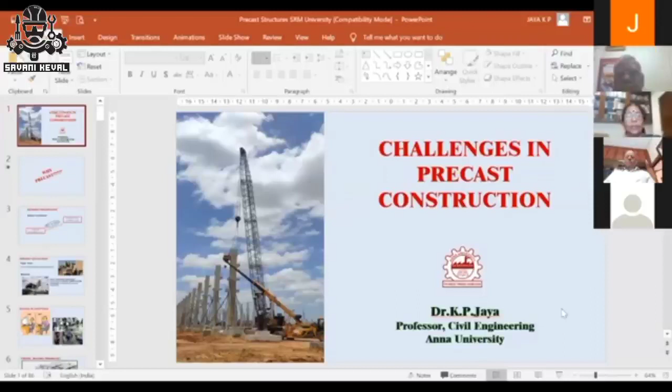My topic today is challenges in precast construction.

Before entering into that particular topic, I just want to say why precast. We are very familiar with monolithic construction, what is happening in and around in society. But we need to think about why we are going with precast.

Look at this particular slide. Think about the demand for housing. In the Indian scenario, at present, around 26.53 million units is the requirement for accommodating our own sisters and brothers to have their own inhabitant. But after 10 years, we are expecting around 50 million units to be the expected requirement.

How will we do this with normal monolithic construction? Now itself we are facing a major issue - lack of skilled workers to execute the project. This is the normal way of constructing beam column connections, and putting partition walls with brick or brick masonry structures. There were skilled laborers available when the demand was less.

But now the demand is too high. We don't have any such availability of skilled workers. So what is the solution? We have to go with some mechanized construction. This mechanized construction nowadays we are calling precast or prefab construction.

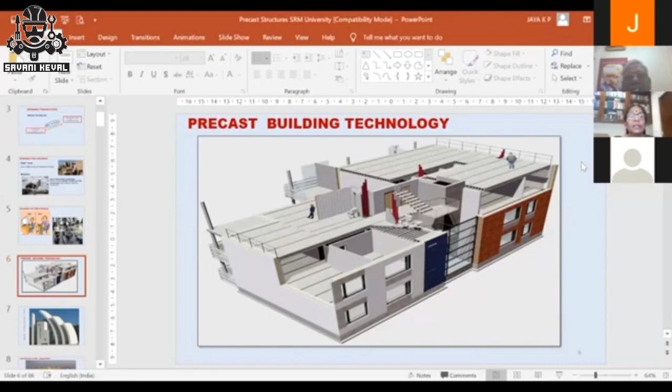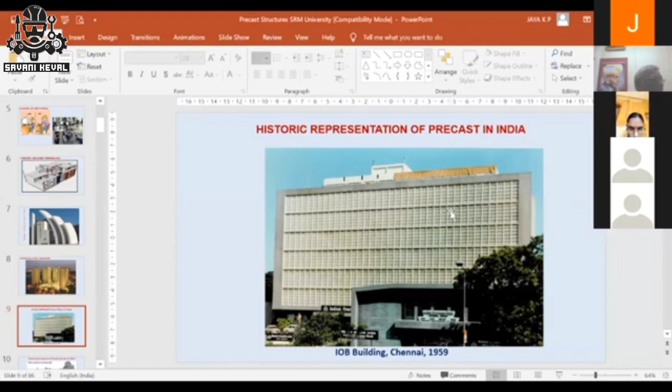There are few strengths like speed, low maintenance, seismic resistance, all those things are there. Along with the strength, there are some weaknesses also, lack of awareness. Many of our engineers are not aware of this particular technology because we are not teaching them in our PG program or UG program. Later, from 2006 onwards, we are in Anna University teaching precast technology for our PG students.

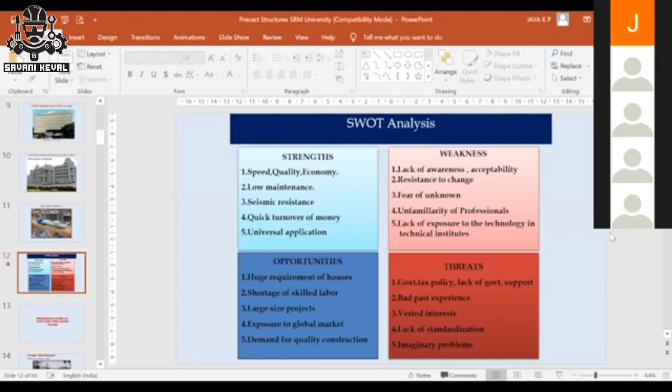Then there will be a lot of imaginary problems with the engineers. Once we start learning something, we will not come to a conclusion that okay, this is the solution - that is the imaginary problem. But once we start thinking about it - to learn swimming, we have to jump into the water, then only we will learn swimming. That is my policy. We have to venture into that, find out what the problems are, and solve them. We, the engineers, are there to solve the problem. So that is the threat we can solve at any cost.

That is the major observation - structural elements were intact, but joints and connections failed. So the major issue with precast structures is poor connections. We need to give more attention towards that. That is the challenge in precast construction with respect to connections.

What are the different connections? Column to... these connections are like our body - there are connections in our bones, knee joint connections, shoulder connections, and knuckles in the fingers are also connections. Each and every connection has to perform perfectly, then only we can do our work without any difficulty. In a similar fashion, precast structures also have different varieties of connections, and each and every connection should be ductile as well as strong enough to maintain whatever service load it has to take care of.

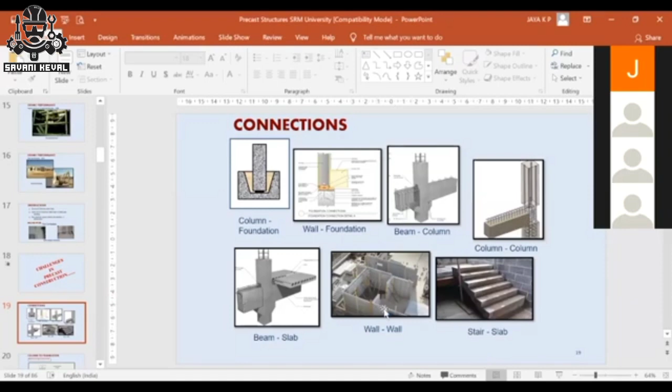Here you can see column to foundation connection, wall to foundation, beam to column, column to column, beam to slab, wall to wall connections, and stair to slab connection - these are varieties of connections that are there. You can see here, these are the column to foundation connections, these are the base foundation. From there, the column reinforcement is protruded outward, and these are the sleeves - 12 sleeves with 60mm diameter, which will be embedded within this column.

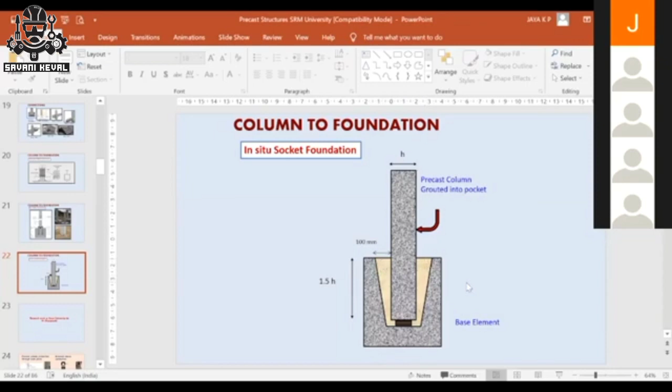Based on this column-to-foundation connection work, one of my scholars, Ms. Mamadi, has done this research. She submitted her report and is about to defend it. These are the different types of connections she has adopted: precast column connection through the base plate, with anchors coming out of the foundation connected to the base plate, and also the sleeve grouted sleeve connection.

She has put — you can see here — this is the sleeve. This is the view of the area where the grout will be inserted in a later part. And this is the pocket connection.

There she has used two types of connections. One is the pocket, where she is inserting the column into the pocket, and there she has put reinforcement all throughout covering the pocket together — starting from one point to the other, connecting these two elements together. In the other type, independent walls have been connected with independent reinforcement, and later, at the joint region, it has been connected together. These are the two types of pocketed connections she has done.

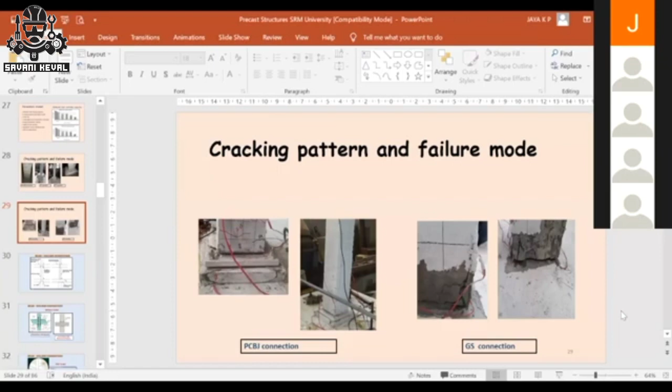This is the view of the load setup in the laboratory. She has done a lot of investigations — this is the cracking pattern. I'm showing this to give a clue about how we can execute research and come out with a solution. Finally, we identified that the pocketed connection with reinforcement wound all around performed better for a low-rise building.

Now come to the next type of connection: beam-column connection. This picture has been taken from Elliott's book — it is a very good statement made by Elliott. You can see here the column is continuous and beams are discontinuous, and here the column is discontinuous and the beam is also discontinuous. If we think about a better option, connection A or B may be better, but what is lacking there? We cannot cast multi-story height columns in the factory and bring them to the site — erection is a difficult task.

So finally, people will go with this type of connection — which one? C-type, where all elements are meeting at a particular junction. Junctions are always dangerous, and here also it is dangerous, so we have to provide proper connection detailing.

These are the various types of connection detailing without corbel. We can go through this — this is the beam passing through the column, the column is discontinuous, and this is the dowel protruded outward. These are the major challenges in precast construction: this protruded bar should be properly inserted within the column sleeves — that is the major challenge. That is why I am telling you that we need to go with standardization. This is the beam-column connection with corbels.

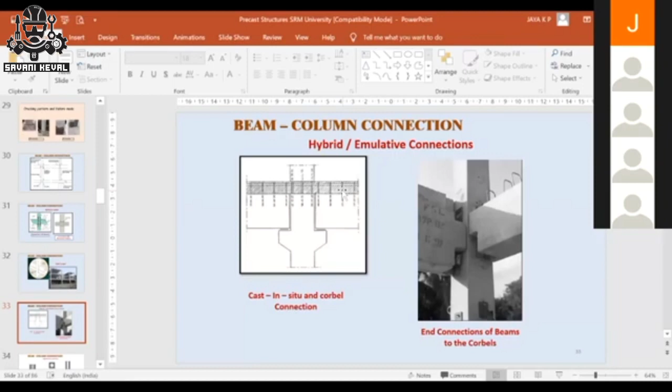So this is another type of hybrid connection. This has generally been followed by Shirke, BG Shirke. There they are using a cavity sort of thing. This is a double column connection. This is a shell, and after erection, this interior portion where the dotted shade is there will be filled in with in-situ concrete. This is the way they are constructing the beam column connection.

Here, beam reinforcement which protrudes outward will be bent into the interior of the column and connected together like this. This is the longitudinal reinforcement continued through the column region. This entire portion, shown with the dotted hatch, will be filled with in-situ concrete. This is the longitudinal view of hybrid connections.

And this is the actual practical view. This is the column. You can see here, this is the protruded projection outward, and on top of this column, the beam edge will go and sit. You can visualize that in the next picture.

So what has happened here? This is the cavity. There you can see the protruded reinforcement also. The main longitudinal reinforcement bar will be connected, pass through this top region, and it will be cast as a single unit in a later part.

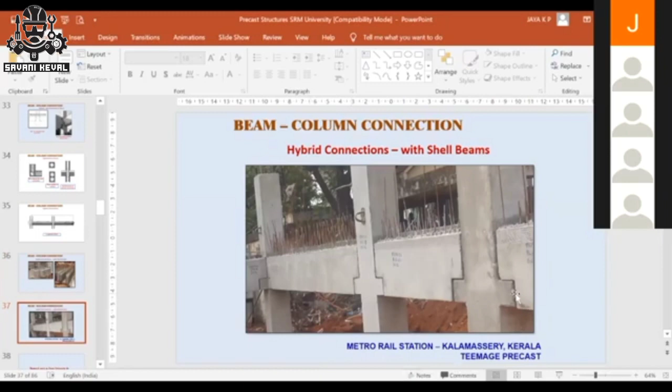This is a picture taken from Metro Rail Station, Kalamassery. This has been done by Teemage at Coimbatore. One of my research scholars has done work on beam column connections. She has done a lot of connections, and we have published papers in ACI journals. These are the various types of connections she has considered.

Tie rod connections, and this is the cleat angle connection - you can see here, this is a cleat angle which is connected here. We have connected with one rod here, another rod here, and this is another type with a single stiffener. We have put this one stiffener also. We have tried one by one.

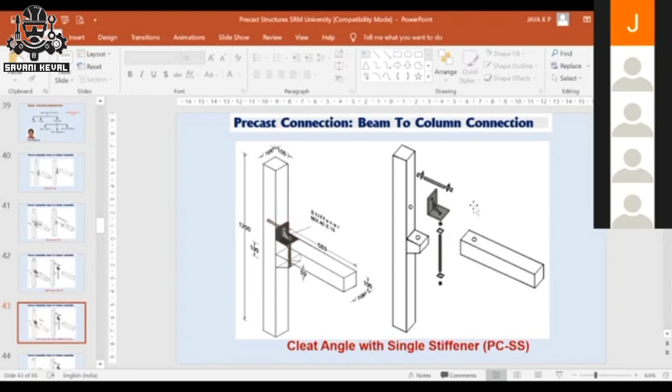Whenever we couldn't reach the strength up to the monolithic joint, we did a lot of improvisation. That's what is shown here - we used a double stiffener also here, and this is the double bar which is coming out. That's what I told you, this is a better solution.

This is a corbel. There's a double bar coming from the column region, protruded through the corbel, and the hole within this beam can be housed through this bar and rest on the corbel. Later it can be mounted with nut and bolt.

And this is another method - this is what we have tested in the laboratory, and these are the specimens. She did numerical analysis also, and we identified that this type of connection has given better performance during lateral loading.

Now comes the column to column connections. This is a very, very important connection in any precast structure.

This is, you can see here, 1 minute.

You can see here, this is the upper column and this is the bottom column. In this particular region, when we are casting, if we are delaying the casting of the in-situ concrete, this reinforcement should not get rusted.

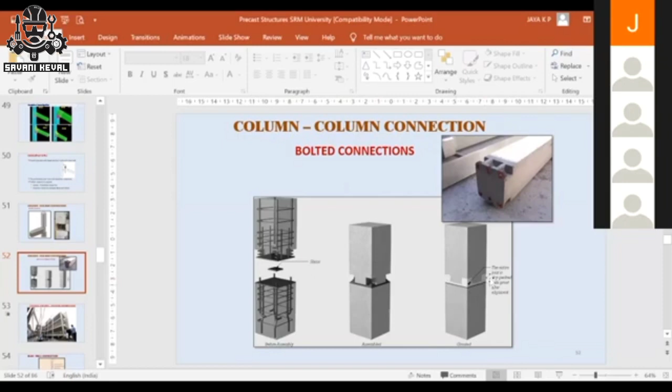So we have to be much careful when going with this type of connection. This is the column to column connection with bolted base plate connection, similar to what I told you about the foundation column connection with the base plate. The bottom column will house this protruded reinforcement, and the top column will have a base plate, and they will be connected together. Later this portion will be grouted with non-shrink grouts. So this is the typical column column connection.

1 minute, let me try this. I have, yeah. Video is viewable. Yes ma'am, yes ma'am.

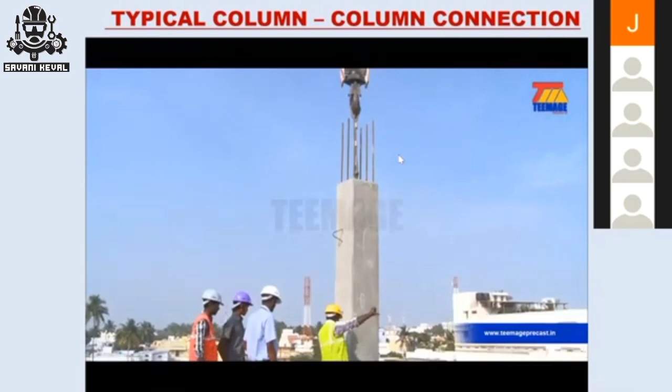This is a video I took from Chennai Silks Velachery site.

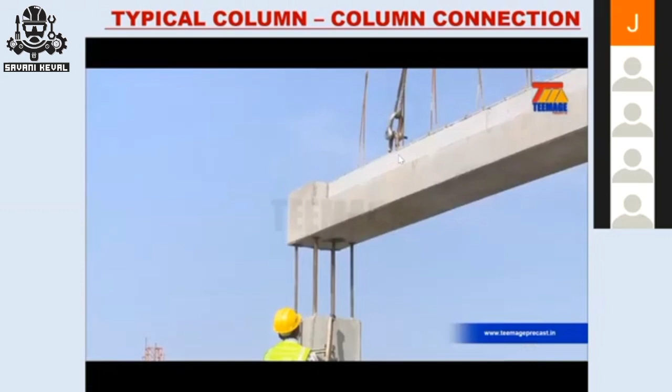I think whatever I told, one scene, it is clear. Am I correct? Yes, madam. Yeah, this is nothing but connection.

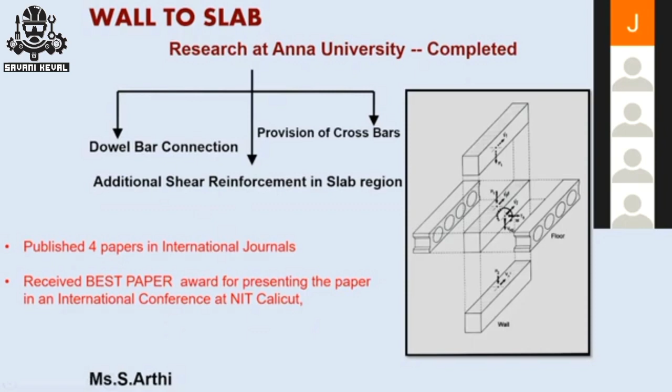One of my research scholars, Ms. Dr. Arthi, she has defended and got her degree, and she has done work on wall to slab connections. She has used many types of connections like dowel bar connection, provision of crossbars, and additional shear reinforcement. She published 4 papers in International Journals, and she received a Best Paper Presentation Award in NIT Calicut also. She is a very good scholar, and she has done very good work.

This is the monolithic specimen what we have kept as a benchmark element.

Gunasharan sir, yes madam, how much more time? 5 minutes I'll get? No issue, madam, please take me, I think I have crossed my time. No issue madam, 2 minutes, 5 minutes, I'll finish it off. Okay.

This is what I can say, this is a wall to slab connection. As you can see here, this is the upper panel and this is the lower panel, and we are getting connected. This is the cross section of the precast element.

There we used, you can see here, this is a wall to slab connection element. And here wall to wall dowel bars, we have provided 1 dowel bar like this. And this is the bar which is getting connected with the reinforcement. Here also we have provided, what I can say, a U-hook sort of thing, and here another U-hook sort of thing.

This is the second type, and this is the precast element P2. Here, 1 continuous bar from bottom wall to the top wall and another U-hook here. And here, this is the precast specimen type 4.

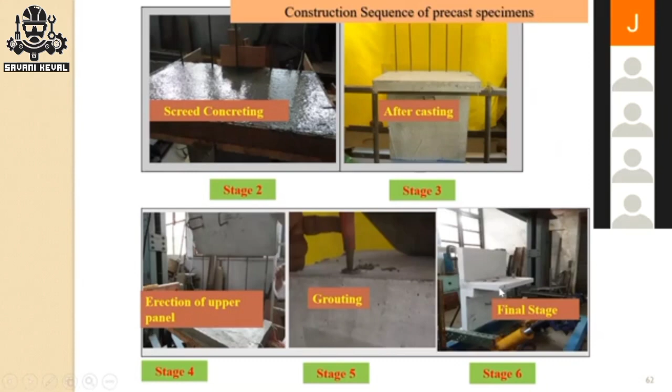The major observation initially we got is there is a splitting up of cast in situ bars, slab and precast slab. Our suggestion, the major suggestion based on this particular study, is we should provide shear reinforcement in between the cast in situ and precast slabs.

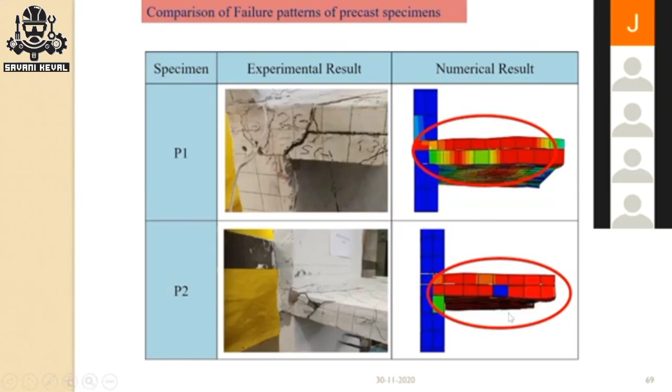And these are the studies she has done on precast. You can see here, this delamination of 2 types of slabs has been very well pictured in the numerical analysis also. Exactly the same way we could picture it in Abaqus software. And these are, you can see here, this lifting up of the slab, exactly we could picture in Abaqus.

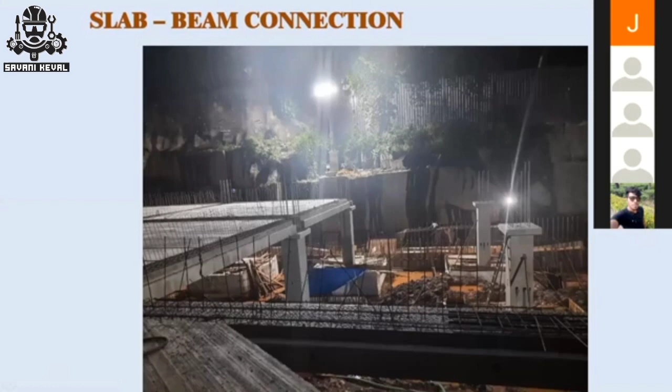You can see here, these are the slabs and this is the beam, and from the beam you can see the protruded reinforcement. While providing a screed concrete, this slab reinforcement will bend on either side of this beam and bind it along with the screed reinforcement before pouring. You can see here, this is a site of one particular precast site image, and this is one of the beam slab connection shown in a small video.

Now you can see here, I'm projecting the wall-to-wall connection from the picture from the side. This is one wall to another wall connection, and we have to provide intermediate loops in between these walls before pouring the concrete.

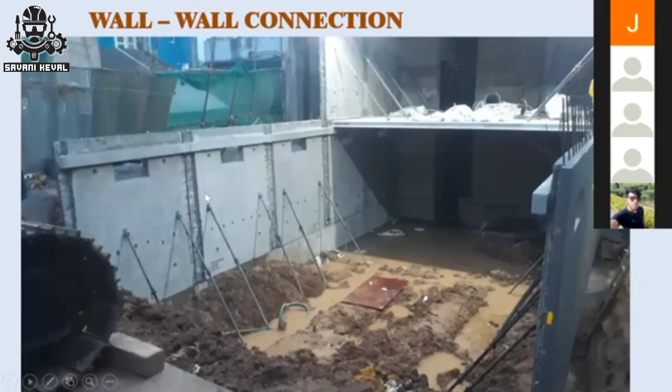You can see here, this interior is the joint region. We are pouring the concrete at the later part after connecting the walls together. You can see the view of it, so this is the connection region. Later, you provide formwork outside this connected detailing of the reinforcement, and the concreting will be poured after placing the walls.

And most of the time, we are using these type of loops or the reinforcement bended like this. There is a lot of work happening at IIT Madras with Dr. Amlan Sengupta and Dr. Meher Prasad, a lot of work related to these wall-to-wall connections.

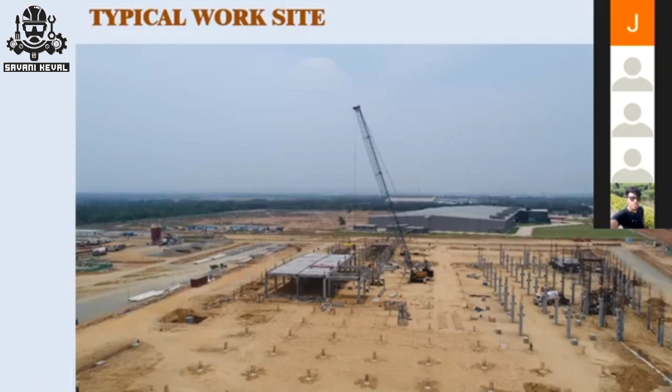But if we get a site like this, yes, we can enjoy like anything, but it's very, very difficult to get a site like this with an open space. So when we do get such a typical site, we can be happy.

So you can go through this book, and I am happy to say that I have authored 2 chapters in this. And there is another book on precast by BMTPC that also gives a lot of important information related to precast construction. If anyone wants to go through it, you can go through that book also.

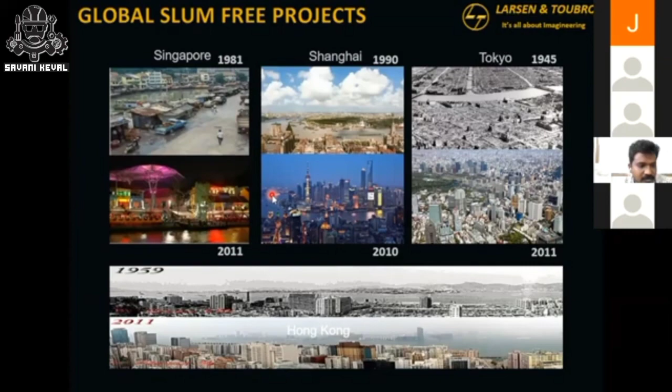What are we doing? We are not doing anything new. Most of our neighbors have done this already. If you see Singapore, Shanghai, Tokyo, Hong Kong - they've all gone through the same challenges, the same housing situations. What is unique to us is, if you see, they've all done this over a 20, 25 year timeframe. We are looking to do the same thing, actually at a larger scale, in about 7 to 10 years. So that's the challenge that we have.

Again, in terms of infrastructure, have we not done this already? If you see your metros, your airports, your high-speed railway now that we are building - the latest technology is already there, right, we are establishing it. If you look around Mumbai right now, I have a high-speed rail project going on, I have an entire metro development going on.

We have coastal road development going on. In one city, there are 3 landmark projects going at the same time with the latest technology—most of the situations that probably not even the European or Western world have experienced.

We are using those technologies, but if you look at housing, somehow that has not translated. We are still mostly using conventional means. 95% of our construction is still built using conventional methods. And if you see outside, one of the key things in how outside countries have solved this problem is by mechanization.

So when I say precast building, that's not the only solution. Any mechanized building, anything that works on a mass scale—maybe PEB, precast. Precast works well because our population is used to concrete. There is a huge comfort in concrete, in seeing that brick and mortar building. So that's how precast is becoming popular here.

So if you look at the end user and what they want, these are the key 4 things. We talk to a lot of them, we do surveys, and we see what the customer wants, what the end user wants. Again, government is not the customer—the people who stay there are the customers. These are the 4 main things they would want from a technology. As long as they get those, it does not matter how you build it for them.

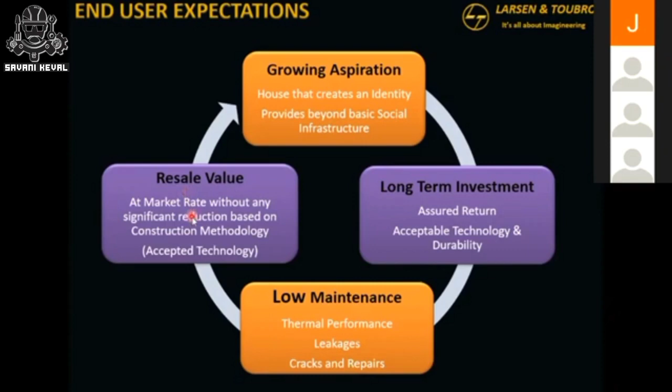And of course the resale value should be acceptable—tomorrow if I need to sell it, somebody should willingly come and take it off. So that's the basis behind what we also look at when we evaluate different technologies. College students, if you go into this field, for the next 10 years we are going to evaluate various technologies to get rapid construction in place. These are the key things when it comes to housing you should be aware of—this is what your end customer wants.

Now what we have done—if you see, this is pretty much the history of L&T. We have been doing conventional construction since the last 50 years. In the 90s, we experimented with tunnel formwork.

This rapid construction demand is not new—we have been doing this day in, day out for several years. If you explore the way the technology works, even to this date, this is by far one of the fastest construction methods you are going to see. It works even faster than precast, but it works only for very boxy buildings. There are very stringent layout requirements that usually are not accepted by end customers—rectangular buildings or very rectangular-ish layouts, which usually doesn't work in Indian construction.

Then around 2000, we started doing aluminum formwork. This quickly became one of the most popular construction methods now when it comes to rapid construction. In residential construction in L&T, 95% of the projects to date have been constructed using the aluminum formwork system—to an extent where within L&T we own probably about 6 lakh square meters of shuttering. Usually that's a huge number.

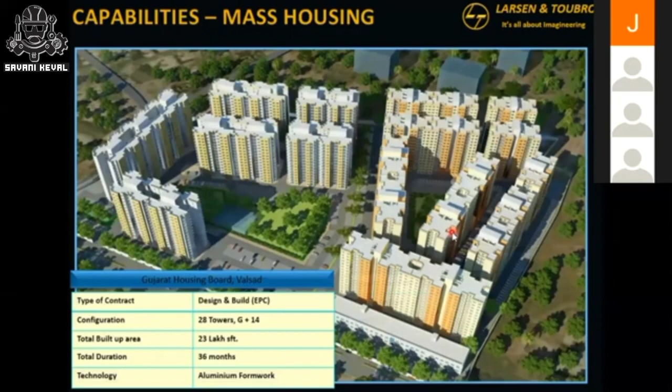So you need to have that enough experience, and we've built that. This technology has evolved out of our experience. We are not a precast concrete manufacturing company. We have selected precast concrete out of our own needs, understanding that whatever you are doing is not going to be enough.

So what I wanted to drive here is, especially for the budding engineers, the building design does not come on its own, right? It's not just putting walls and columns and pouring concrete. A well-designed building has to be looked at, investigated for various parameters, especially if you're looking at mass housing.

We are looking at building 100 buildings, 20-story tall. You have to look at the cost, speed, what the end user wants, what are the bylaws, what are the structural integrity requirements on the design.

With all those parameters, if you work together, L&T is one of the very few contractors who has his own in-house design firm. I used to be in the design field, now I've moved to the BU side. But one of the few contractors who have all design engineering teams, including structural design, architectural, MEP, CMPC methods. So we get that one unique solution, and that's how the precast technology at L&T has evolved over the years.

So the client gets one answer. He's not going because you're doing precast, what do I do with the MEP? And we don't say that you go to a different consultant. The solutions that we are looking at will probably over the years set the industry standard, looking at all engineering aspects.

Now, before we start going further, one key point to note is we have usually 2 different systems. One is the beam column system in residential construction, which is what we have been doing for several years. And then the new rapid construction, what we are looking at, usually the aluminum formwork system, the tunnel formwork system, or this precast. They come under this load-bearing shear wall concept.

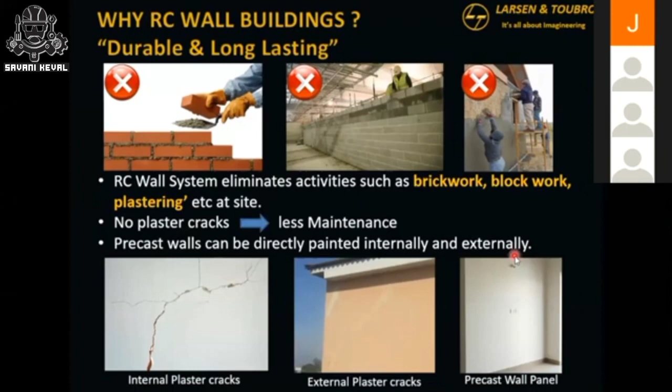So this is one example - this is our own project, and what you see is especially for the mass housing or this government housing where the maintenance budgets are not sufficient. If you see this building, the first story was done in cast-in-place, and the above is precast. This is a 9-year-old building which has been handed over. And if you see the plaster, this was actually year 2 and year 3 where it starts fading, spalling.

The paint is going on because the plaster was never meant to be a long lasting element, right? It's a finishing element, but it absorbs moisture. The moment water gets into that, you're going to see the paint fading and all. Here it's an RC grade concrete - the paint has not been retouched for 8 years, and this picture was taken about 6 months ago.

So in 8 years, that building has stayed the way it is. I'm not going to go into key details or advantages, but in general, whatever benefits you get in RC aluminum formwork type buildings, you are going to get the same benefits in precast, plus the advantage of speed and quality, which comes from factory quality control.

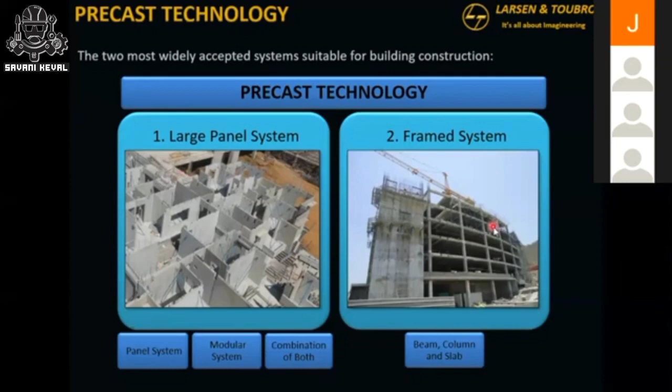How about the design now? What do we do when the precast design comes into picture? Even in the structural philosophy, there are two main things. We are probably going to focus on the large panel system that we proposed for housing. Then, of course, there is the beam column system and separate research. Professor Jaya has already covered a lot on those connections.

When it comes to load-bearing wall system, all you are looking at is dismantling your building into as many 2D elements as possible. Those are easy to manufacture, easy to transport, and then you take them to the site, assemble and stitch it. What we call stitching is the wet concreting to connect these two members together. So there is no rocket science.

But from a contractor or rapid construction perspective, the conventional construction system involves formwork, reinforcement, concreting, then you come back and do block work, plastering, POP work. What we are doing in precast is mainly eliminating this block work, plastering, POP work, which usually takes a lot of workforce and workman activity. Whatever key or cumbersome activities are left are done at a factory, then you transport the element and finish at site. That's where your advantage of time is coming from.

Structural design philosophy wise, in the conventional beam column system, we'll have beam columns as gravity elements, and some lateral shear wall elements which take your wind and seismic lateral load. What we are proposing here is that by default most of the walls are going to be load bearing members, and some of those walls will be shear wall elements, and that's how you design the building. It has its own redundancy.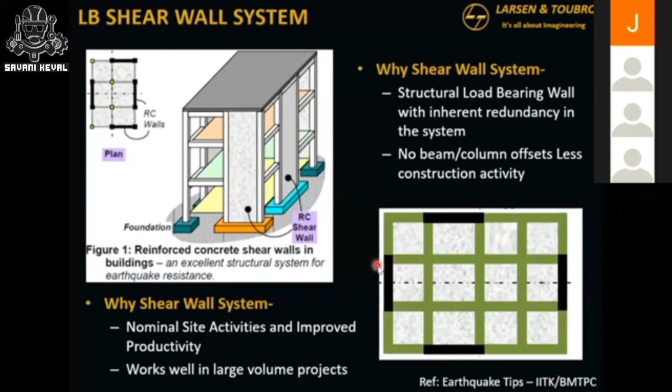In the earlier system, there's a progressive collapse requirement, and if one column is damaged, your entire large area is in question. In this system, if one small portion is damaged, there are still several walls to take care of that element, so that redundancy is better.

Now with that system, how do we analyze the precast system? What do codes say? This is one thing I want to stress with everyone. In precast connections, there are two different schools of thought. One is the emulative approach, which says you detail your system such that it behaves equivalent to monolithic RC construction. Then there is the jointed approach - welded and bolted connections. Before I came to India, for 10 years I was doing only welded and bolted connections. Nobody was doing the emulative approach there.

Why? Because it takes time - there is wet concreting involved, it's more expensive to do it that way. Welding and bolting are easier. Second, usually they don't build tall - buildings you will see are 12 to 15 stories, not more than that. More than that, usually steel is cheaper there.

So that works well there. Here we are building 23 stories, even we have designs for 30 stories, where the emulative approach works well, even if it comes at a slight cost of time for site activities, but performance and design is similar to conventional construction. That's how we have taken all our residential projects that you see - they're based on this emulative approach.

If anyone is interested, there is the ACI document 550.1. There are various revisions, but this is one of the best guides from the American Concrete Institute. What it says is basically emulative detailing provides structural performance that is equivalent to the structural performance of a monolithic concrete structure - equivalent, that word is important. So you do your detailing well, and then you construct. Once it performs equivalent, you are not worried how it will respond to earthquake - it's going to respond similar to a conventional building. That means you can go back to your 456, which is the most involved code in India, and adopt the same code for the design principles. Of course, we also have 15916, the specific precast code.

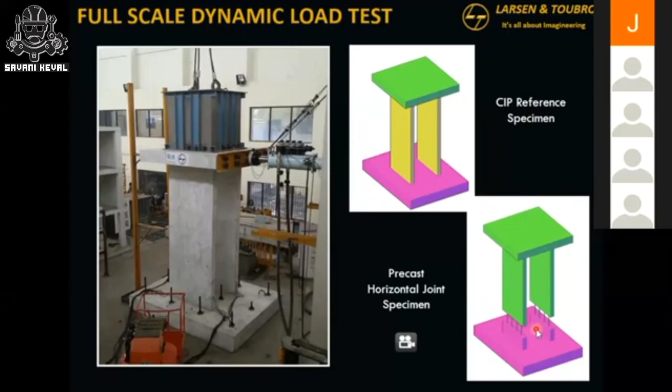We wanted to see if the conventional specimen behaves in a certain way under the exact same condition and same loads, how the precast elements with this horizontal joint would behave. We had three different elements with three different types of connections, all following this emulative detailing principle, and we wanted to see how it works out.

This wall is different. We use grouted couplers to make these connections. This is one of the very popular systems used in Europe and Western countries to make connections, the grouted coupler system.

And why it gives better performance than even the conventional system is that the conventional system still has detailing based on lap, so your lap connections are governed by the concrete around it. The principle is, if that concrete around is confined, that's exactly why we do the horizontal shear loops to confine the lap bars. If it's confined well, it will give better performance.

In this grouted system, this metal sleeve is confining the grout. To visualize this, your precast panel is here, you have this coupler, and the next precast panel bar, a male bar, goes into the female part. This is then grouted together to make that continuity. Because this is confined well, even more than the confinement effect you get in a conventional RC system, it produces a better response for the same steel being developed.

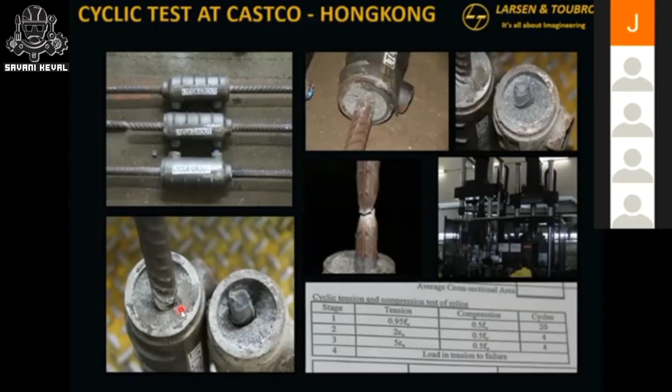It's a high strength grout used. The bar yields and fails, there is no brittle failure. This is exactly why you saw that higher ductility response on that last wall, which gives performance even better than the conventional system.

Now I'll run through this quickly, but one point I wanted to drive home: when you look at shear wall connections, especially what we are doing, it's actually working really well. We did another test program where we looked at the diaphragm action, how the slabs collect loads and transfer them to the shear wall.

Again, full scale specimens, and everywhere we got more than satisfactory performance, validating that the detailing we are using is actually effective. This is the same discussion on CIP concrete versus precast slab. For delamination, with the kind of detailing we used, we did not see the delamination effect, because the detailing was done right according to the forces and all.

Same for the vertical shear wall joints between two panels, again we tested and validated for that shear. So the entire system we are proposing for this load bearing shear wall for housing, those key connections have been validated in house.

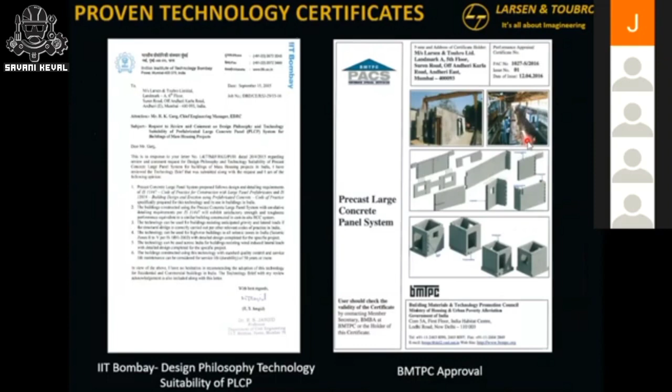All the details, emulative detailing, have been in place for the last 50 years. People have been using it outside. We have not evolved or done anything drastically different, we have probably tweaked it to suit our requirements and then adopted it.

So the next phase was getting approvals from various agencies, and this system we use now has BMTPC approval, which gives fast track adoption in all government projects.

Of course, IIT Madras, we work very closely with them. All our projects, Dr. Meher Prasad and his team, get peer reviewed by them line by line by default. IIT Bombay has also reviewed it, IIT Delhi has reviewed it, we have College of Engineering Pune, VJTI Mumbai, all leading institutes. They have gone through it in detail, what details we are doing, and we are ready to use it in any large scale projects.

I think time-wise I am already slightly behind. We will just go through the case studies quickly, and then we'll open it for questions. These two projects I wanted to mainly focus on.

G plus 23 story, about 70-meter tall buildings. We built 6 buildings in Mumbai. This was one of the first projects that we did, about 2,000 houses. In the pictures, you see 3 towers. We built another 3 towers later, so total 2,000 units there.

This is the Provident Sunworth project. This came in the 2013 timeframe after we did this. This is 66 buildings, about 6 million square feet built up area. The earlier one was about 1.2 million square feet on the scale, and this is a much larger project. We have handed over phase 1 and phase 2 already, about 3 years ago. And then some of the commercial buildings that we will go through.

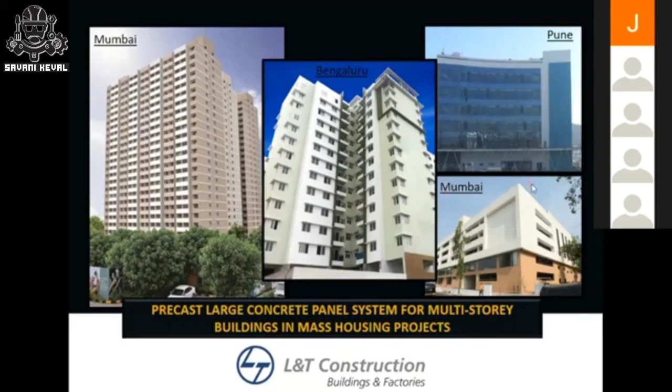Provident, I'm going to spend a little more time on since we're running out of time, but various awards are already in place. Even the ICI award for the Mumbai project—ICI started one new precast award, and we got the first year's award for that Mumbai building.

But this one certificate talks about something we're more proud of than anyone, because it came extemporaneously from the client for the speed. That G plus 12 building was constructed in 3 months flat. That's the speed advantage you get from this technology, where conventional construction would take at least 5 to 6 months, if not more. We completed that in 3 months at peak.

So this is the project snapshot. These are the 4 phases that you see in each band, and we have completed 2 phases. The balance 2 are under works.

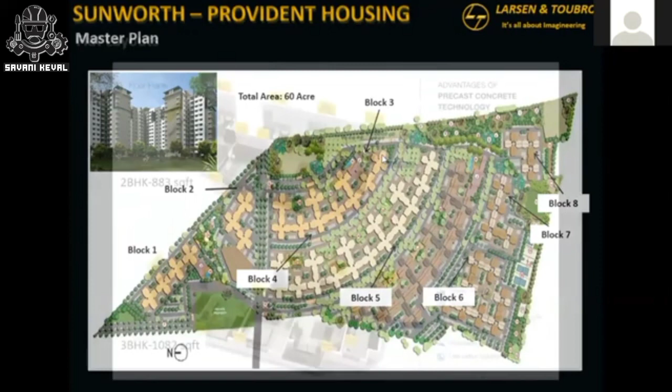One thing I wanted to point out: the first building I showed in Mumbai was a PMAY housing or SRA building—all units same, smaller units, typical layout. In this Provident project, it was pretty much like a sale building. These sale units, 2 types, whatever is there in the market or any traditional housing you would see, the same was taken and adopted without any changes, and we wrapped the technology around it.

In the first year, the developer was saying, okay, whatever precast I adopt, I'm not sure how the users will accept it, so they were not actively marketing it. Two years down the line, this is from their brochure saying 'advantage of precast,' and they're telling people openly, saying I'm building this in precast, I'm proud of it. They even gave us another job in Chennai down the line. So that's how that adoption has come over the years with this technology.

So these are some pictures during construction, and these are some finished pictures. When you see buildings once they are done, the whole philosophy behind pushing new technology is that the end user should not see anything different. The whole idea behind detailing and execution is that once the product is finished, even our own engineers may not be able to tell exactly where the joints are or how the building was assembled. For them, it's just a finished flat.

If you see, this is one of the finished buildings—it looks exactly the same as they would have expected. Even if you walk inside the building, this sample flat was also built using precast, and the way it's finished, once you walk inside, you don't see anything different than what you're used to seeing. That is the goal.

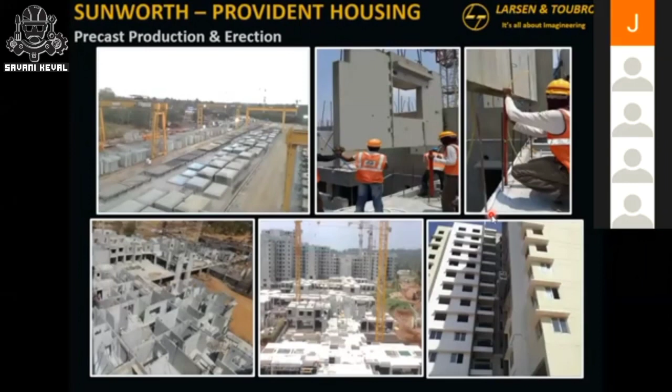The factories are set up. The whole advantage of this technology is very few people are needed. If you see our factories, you won't see an army of people working. This picture is not taken on a Sunday, it's a working Wednesday—there's a gang of 12 people. They know exactly what to do for the day. Whatever 30-35 elements they need to erect, they will erect. There's no material stack, no machinery lying around, very minimal setup, and they do the same thing day in and day out.

Second thing—the speed depends on how many cranes you put in. If you see aluminum formwork, it depends on how many sets you can put in, and that's an expensive affair, a capital expense. Here, my factory is already sized. If I want to open up another 2 towers, I can—all I have to do is rent one crane and put it in. The factory is already sized for that production.

So that's the advantage. The quality control aspect is this—if you see Bangalore, this factory did not even put up a shade because it doesn't rain there, but that does not mean the standard quality is not followed.

We still have the same quality measures, same quality parameters that you use on any conventional site, but you are working on a ground, right? In tall buildings, working on ground versus working on a 17 story building is an altogether different ball game, both for the workmen and for the monitoring. Somebody has to climb up there and see, whereas here the person is roaming around at the ground level every day, checking everything in detail and then only approving it.

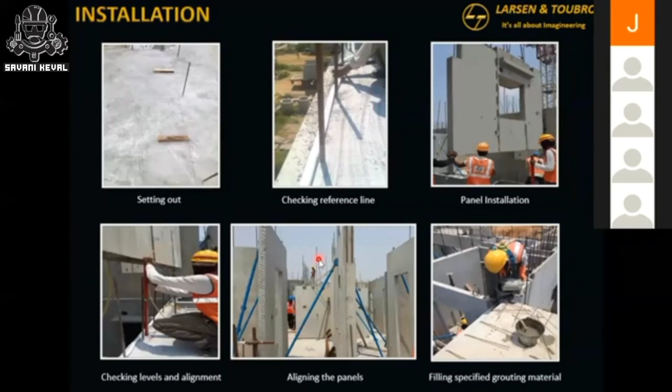When the elements go outside, the same quality control applies - a well-trained gang of 12 to 15 people who know exactly what to do. They don't have much to do also, since elements come from the factory ready. You just have to prep the slab, make sure all levels and lines are maintained, the dowels are correct, clean the joint, erect the panels, align them using push-pull props, make sure the joints are grouted, put your slabs, and then do the slab concrete pour.

That monolithic pour is what we mean when all these slabs are erected and then the entire floor gets a continuous cast-in-place structural topping, 75 millimeter thick, that acts as a diaphragm giving me the continuity and stitching that we are looking for.

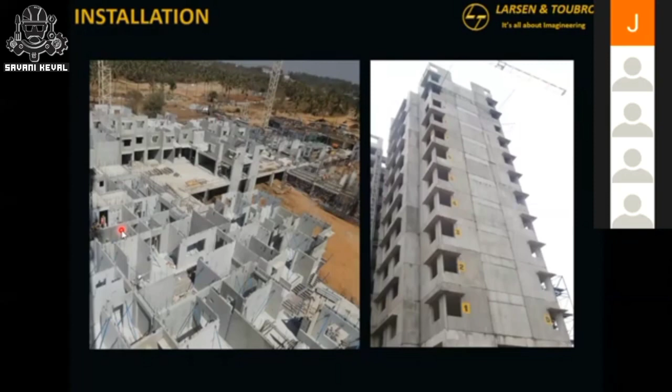So yeah, this is the job - this is how the architect had envisioned it in 2013, and this is how we finished it in the 2016-17 time frame and handed it over.

This one job quickly, just to give a flavor of how we adopt different approaches - it's a very small job. Usually we don't even venture into these jobs, but this came up because they needed it in 8 months. This is a hostel building for Tirupati Devasthanam. They were originally G+3 systems, designed for 2 extra floors. Given the kind of speed we were using, the client said add the 2 floors immediately, because they weren't sure if 3 floors would be completed in time. So the design philosophy was build 3, start using the hostel, and add 2 floors later. But with our speed and system, they said add the 2 floors and finish the building - so this is how it's done.

It's a small building, we had 4 or 5 buildings. What I wanted to show is 2 unique things. Because the founding level was less, we had rock at about 1.2 meters, so we did even the plinth work in precast, just to save time. Traditionally you'd do foundation, plinth, backfill, and then precast starts at the first level. Here, because the level was low, this is the raft top you see, and even the plinth walls were built in precast and completed, then the backfilling was done.

Now if you see this building, about 1200 square meter area - conventional time would take at least 20-25 days including all activities. RC work itself would take 12 to 15 days with formwork, shuttering, ground water issues and all. In this picture, the entire footprint was installed in just 3 days, right?

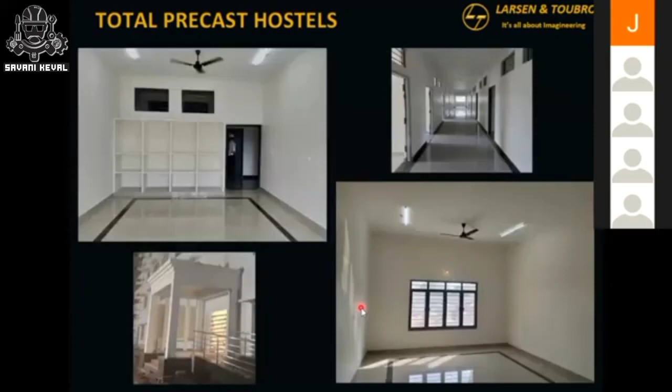The second thing I wanted to showcase is this building, a small building, but they had a dining hall at the bottom and then the rooms above. So they wanted open spaces for the dining hall. So what we did is we did this as a portal frame.

This is a transfer beam which carries the above 5 floors and gives me this open space. It's a 7 meter long beam, and this was done as a moment connection. Usually we do simply supported connections because moment connections are difficult to achieve.

It takes time at site, but because they wanted this open space, a simply supported beam would have been at least a meter deep. When I got the moment capacity at the end, this was fitting in 700 depth, which was fitting in the building height. So we did that. This is a moment frame.

This is a secondary beam which needed a corbel. And now see how we work with the architect depending on the system. So I technically only needed corbels on these two sides for this and this beam.

But then the architect, we sat together, and he said I have to have the corbel. Then we came up with this shape that worked well. Then he said, okay, for symmetry, if somebody is sitting here, why don't you add this corbel? So this corbel was added more for architectural reasons.

Then we took the benefit out of it, but this corbel was added to get that architectural impact, and they were going to put these gods and goddesses photos on this when the dining hall is complete. So that's how it was worked. They said, I will work with your corbel, but you give me this extra corbel, and it looks very clean and nice.

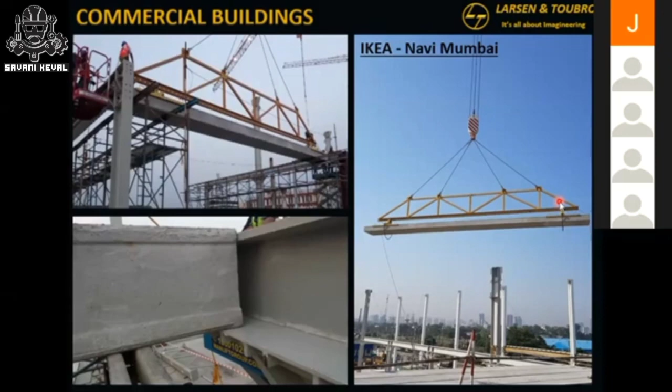The floor was completed in 50% of the time that was envisaged for conventional construction.

This one, we are doing currently in Vizag for a substation building. If you see here, this is where we have done 2-story tall columns. These are 12-meter tall columns. So that saves me time, and we are getting that continuity. The other beams and connections are designed to get that monolithic and moment frame capacity.

But it's a very fast-paced job. This is another job where these facade elements are done precast. The building itself is conventional. The entire facade, which was envisaged in block work, we converted that. About 2,000 elements in the job.

About 1,000 is done already, and all they have to do now is just paint it. No plastering or anything, just treat the joints and paint it.

Same thing we are now exploring in a job in Mumbai. This is a 27-story tall hotel. The entire facade is planned in block work, which takes a huge amount of time. We converted it to 2 floor-to-floor tall precast panels.

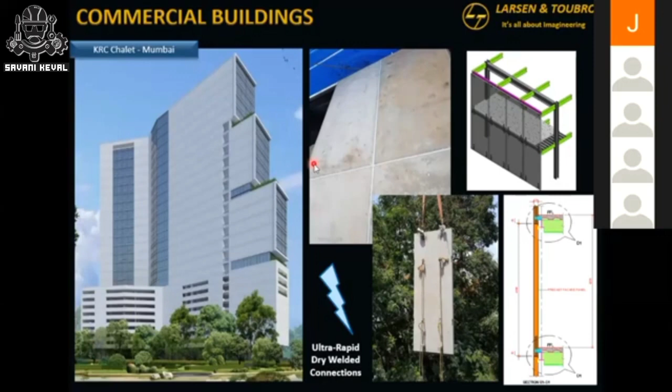Each panel is being erected under 30 minutes. Imagine a 4.2 meter tall panel, 2.3 meter wide, erected in 30 minutes - that's the speed we are looking at on site.

Pre-finished has been a big thing for us. In Mumbai, all residential buildings, even one of the topmost elite housing buildings, we are now using bathroom pods. The idea is the pods are cast in the factory, the entire toilet unit finished, everything at the factory site, no activity at site. Lift it, place it, and it just gets opened once the site nears the handover phase.

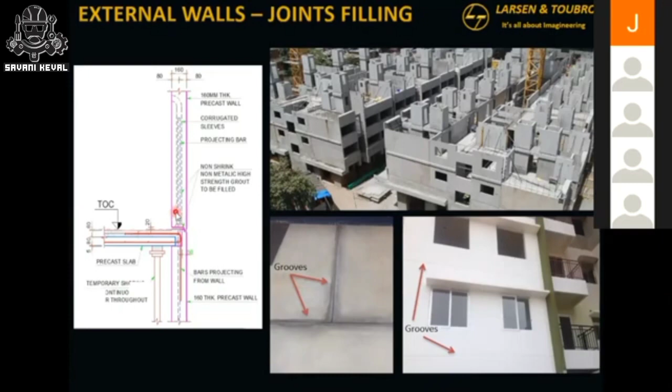In addition, we do additional treatments at the joint. Usually you won't do waterproofing inside - this is between the living room and kitchen. As management, we've decided that even within the flat, if there is a joint, we treat it - not just between two flats or two living rooms, but all entire joints, we take that extra precaution. Then we do subsequent water ponding in select areas to check how it works. So it's as good as building water tanks.

Even for the external joints, we have a rainfall simulation test to check how the joints are performing against moisture entry. Now we have IS 15916, the 2020 version, and these requirements are actually incorporated into the IS code itself, so you have the basis to ask the manufacturer or vendor what kind or scale of testing is needed. Those details are available. The last part of quality control is testing and scoring our own buildings.

So we have an in-house system. If you are familiar with the Singapore system, they have CONQUAS, which is for conventional quality assurance. We developed something similar to that, calling it precast building quality assurance system. We are scoring our own buildings for various aspects, structural, architectural. We have our own teams that go and score these points.

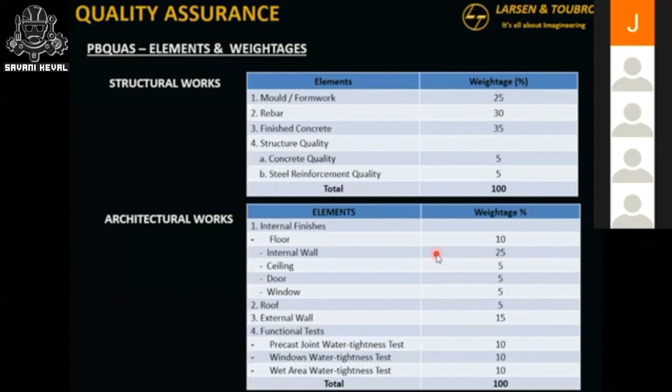When you come as a client or as an end user, I'm going to show you the Provident building and tell you that this building is scored at 85. This is how we have scored it. When you get your building, it's going to be 85 or more. And there is a basis, there are scales, points that physically even the client can come in and check. So the idea is not scoring higher, the idea is creating a benchmark. So for the next 20 years, we have a benchmark saying at least this or better it should be done when it comes to precast construction.

So with that, I think we'll quickly go through that CIDCO project, what we are doing, and then the outside world, and another probably 5 minutes, and I'll wrap it up. So this CIDCO, what we are doing now, it's a PMAY housing project, of course for that kind of volume, 7,500 units. The total project we took is about 22,000 houses.

The entire thing was supposed to be in precast, that's how we had tendered it. But it came right at the COVID start in 2020, so we decided to split some and use a conventional system, because most of our factory, the molds and everything, comes from Europe, which could not come in time. So later, last year, about 8 months back, we took up the balance scope. We have started now, we have set up the factory, and we'll be completing about 7,500 units using this precast technology. So this is the project.

If you see all these buildings, all these are LIG type buildings, and the volume is there. The units are similar, where we can easily adopt the precast technology. These are done by the architect's office contractor. Their whole goal is, I don't want a typical traditional monotonous building, so they have their architecture. This is one of the first things where we are actually incorporating the architectural details in precast.

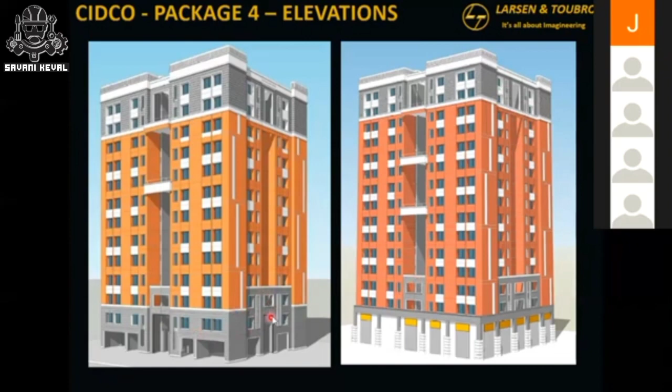Traditionally this will be all taken care of in plaster works, right? It's easy to do it that way, but it doesn't last. So we took that conscious call saying I want a maintenance free building. So all these architectural features, grooves, everything, we are actually building into the precast panel itself, so we don't have to worry about durability.

So this is the factory setup at site, about 2.2 million square foot built up area per year capacity. All molds, some of them in-house, some imported. But yeah, these are the buildings, this is about 2 months old photo. But this is what I was telling, the grooves, the bands around the windows, features are all inbuilt, so I don't have to do any plaster work.

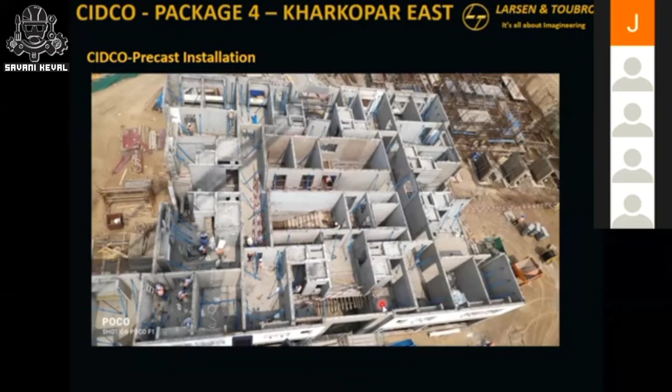That's the goal. This is a typical floor that you will see again in these buildings, all flats are the same flat. So each floor has 8 flats, and all 8 flats are the same there. That's how we are working at it. If you want to look at the speed, this project at its peak, we will be building about 35 floors per month. So if you do that math, it comes to about 10 flats per day. That's what we are aiming and hoping to finish, and that's where the speed comes into picture.

Now with that speed and this kind of volume, if you see the entire project, that's 7,500 houses, we are looking at about 1,15,000 elements that will be produced and installed. So how to track it, how to keep track of it, your usual day-to-day Excel planning is not enough, your MSP planning is not enough. So we take advantage of this whole digital environment, that anyway as a company we are pushing for, we have adopted that. So everything works on a central BIM model, and all other agencies that work around that model, including the reviews, client reviews, progress reviews, factory production, site erection, everything is monitored through it.

We have an in-house app built for that, and each element is tracked from its inception to installation — when it was cast, what grade concrete was used, when it was demolded, and at the time of demolding, what the concrete strength was. The entire history is tracked for each panel.

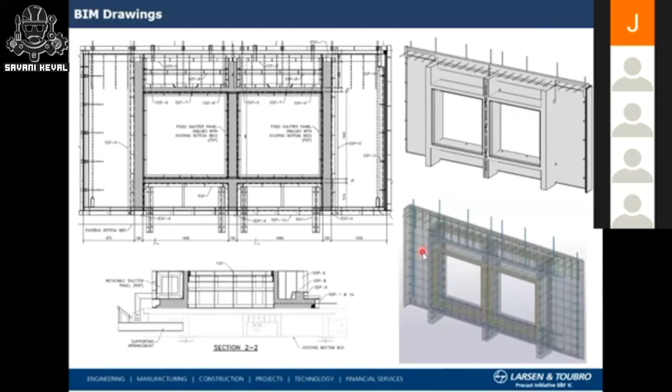For the BIM model, all the drawings are also developed directly through it. We are shifting away from 2D development. In the BIM models, even the reinforcement and detailing are built into the model. Once the model is ready, the drawings are ready too, with maybe some nominal work, and we take it from there.

Then when the action shifts to site or factory, this is the app we use. Casting, demolding, storage, factory storage, delivery — everything is tracked for each element, item by item, including checklists done on the app.

How this benefits me as a monitoring or review agency — this is the entire snapshot. For whatever ongoing scope of the month, if I'm going to produce 5,000 elements, I get to see the entire thing immediately, with live updates daily on the phone, showing how many are cast, how many are in the factory, how many are in site storage, and how many are already erected.

When it goes to site, the entire tower is tracked, each tower, each level. Nobody is punching numbers anymore for status in Excel. All they're using is flashing their phones. That's the idea — using the phone to get real-time updates so you can track your projects well.

Once you track those well, quality control automatically follows, because the checklist and everything is at one central place. So with that, whatever we are doing now, we are very comfortable with the technology — mass housing, it works.

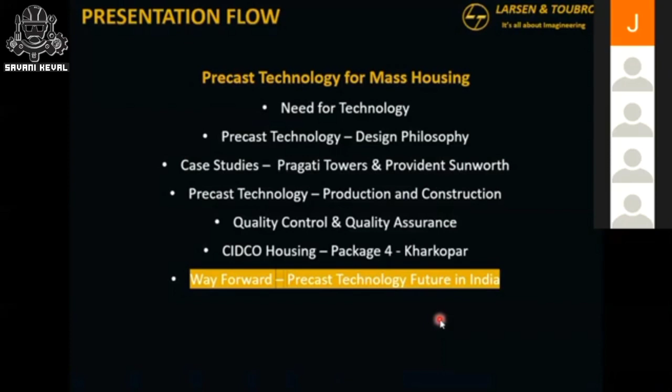What next? How we'll see this in India — some of these projects I just wanted to showcase. These are all architectural projects that I had managed when I was in the US. This is something we will start seeing more and more now that we are comfortable with technology.

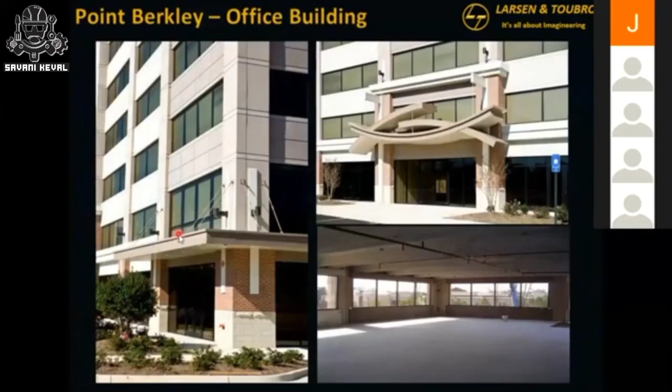Right, I think we're running out of time, so I'm just breezing through it. These grooves and patterns behave differently, and architects have their own approach for shadows and such, but everything is worked out at the factory and then installed. In India now we're getting form liners too. There are multiple companies where you can produce these patterns. We are even looking at graphic concrete and these features, so going forward this is something exciting that may come up.

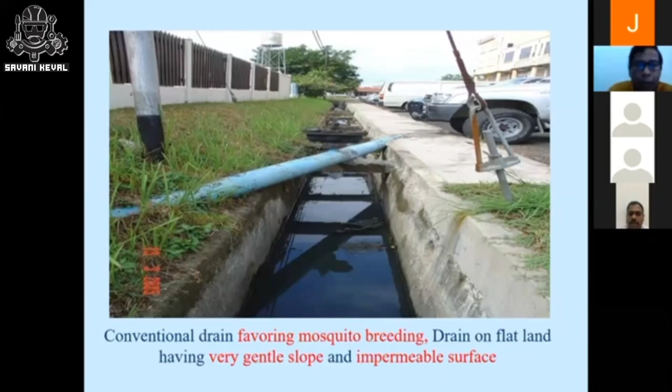Look at another drain, the field drain favoring breeding of mosquitoes and other insects, seen very often in conventional drain systems. This is the roadside drain. It also poses a health risk. This is the issue I looked into, how we can solve this, because the structure itself comes from the drain.

Again, in the drain there are countless insect larvae in this stagnant water. We people are educated, yet our intention is always to throw rubbish onto the road, which later goes into the drain. So this happens, and it also causes problems in this concept of housing areas. These are the issues I looked into, how to address them.

Then we made this product. The first product was made of oil palm shell, because my research started with oil palm shell lightweight concrete. The product was made fast, with only my final year student and me working on it. Gradually we went into some depth and discovered this product is cost and time saving, an IBS product. In those days we started making it by hand.

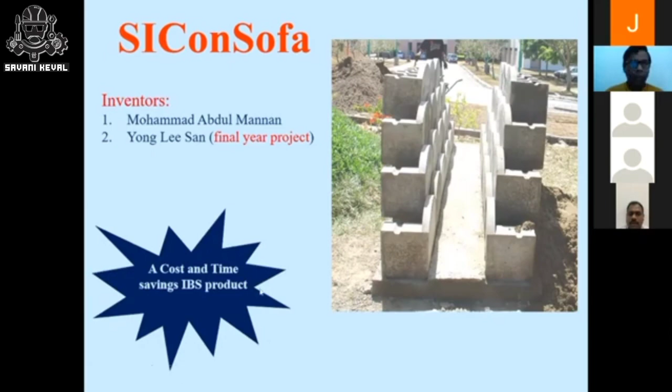So the name we gave it is SIConSofa. I haven't explored all potential applications because I left that university; now I'm at another university and cannot continue that same research here since it's patented. So let's look into the anti-mosquito drain for normal purpose.

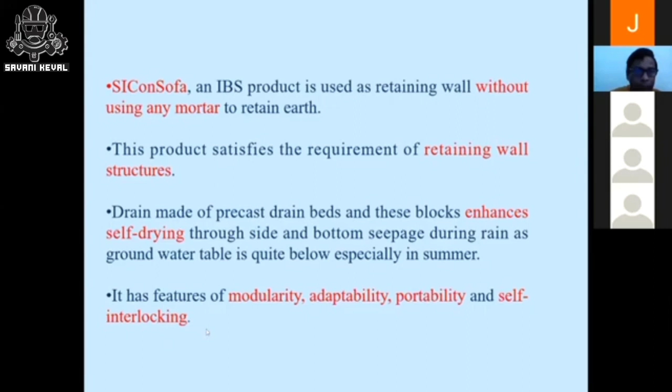This product has performance absorbing minor movement due to the dry stack flexible structure because of interlocking. From a cost-effective point of view, it's dry stacked without using any mortar, uses ordinary grade concrete, and saves installation time and manpower by about one-third of the conventional system.

It's massive because we can produce a large number. From an aesthetic point of view, it ensures beauty at the exposed face. From an environmental point of view, it eliminates mosquito and insect larvae breeding. It's a user and environmentally friendly product. Installation is very rapid and simple.

I have tried this - 30 to 35 meters of wall area can be done by 2 persons with a simple lifting device. From a market point of view, there's high potential because industries are in line with my previous university, and they are pushing me to continue.

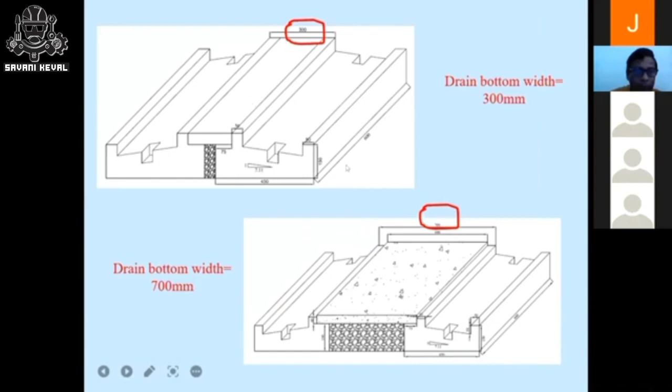We also looked into this going for many types of purposes, maybe maintenance. The drain width can be 100, 300, or the drain bed width 700. Everything is precast - this is precast, this is also precast, that cover is also precast. Like this, we can fill infill material inside. Our drain width can also be 1,500 or 2,000. We looked into several values, but the precast component like the holding or bedding one is the same size.

Then we looked into the drawing, the 3D view, of how this can be arranged. We also looked into how the rear side is seen. We did it like this. Then we also made the mockup.

Before the mockup - it is 7 meters long, about 1 meter deep. We considered using 120 units. We used the block to see how many numbers we could put vertically.

Then after that, we also considered that sometimes in the drain we need cover blocks. We put on a cover block to see whether it could work or not. We did that because our money was limited, so we looked into optimization on that money.

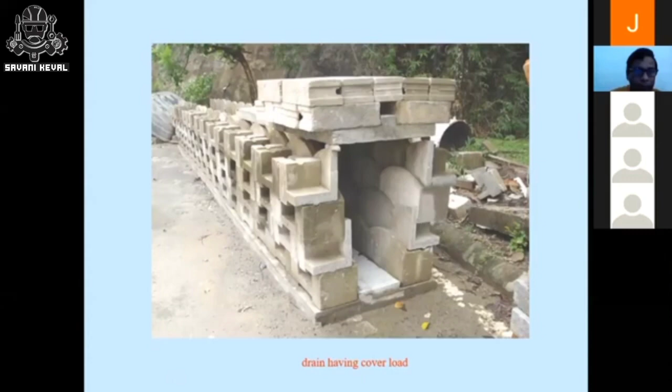Then a company came from Uganda. That person passed away just 3 months back. So that company got this license from my previous university.

Then Binapuri, one of the biggest construction companies in Malaysia, considered this product. Based on that, they say being 100% precast products, including the bedding block, claims that man-days involvement at installation is about one-third of conventional cast-in-situ concrete. This is Binapuri's comment.

Yes sir, can you hear me? Yes sir, can you hear you? Yes sir, okay, okay.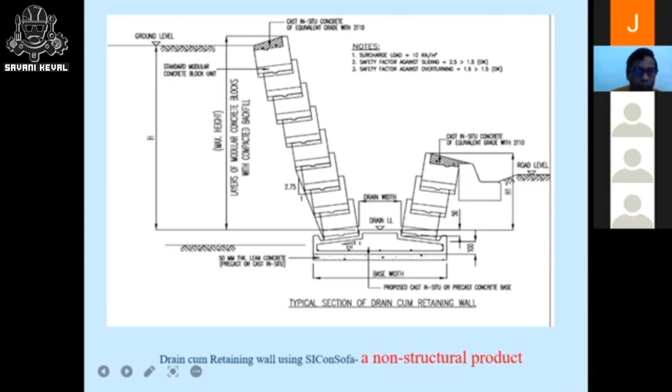Because we produced the block, we started with 3 workers. Ordinary workers, not skilled workers, because this is labor, they simply have to assemble there. So they started, and after that the rain started. On the rainy days, the people also started doing the work. These people belong to another company because they have to do that side, so my staff are doing the assembling here. So during these rainy days...

Because this was the first project, we had difficulties, I have to say, because there are several molds, and all molds are done manually. All molds are not the same, so when you go to fit them, they don't fit properly. It took a little extra time, but later on we solved the problem. This minor problem aside, look into this - the backfill was not done completely, several layers were there.

Excuse me Prof. Manan - yes. Hisham here, your voice is not very clear just now. Maybe if you turn off the video the audio will be okay. Okay. Can you hear me? It's clearer now. Okay, thank you sir. Okay, thanks.

Okay, just look into this one after completing. This is the L pattern of the drain retaining wall. This is the deeper side. It was installed in 2010.

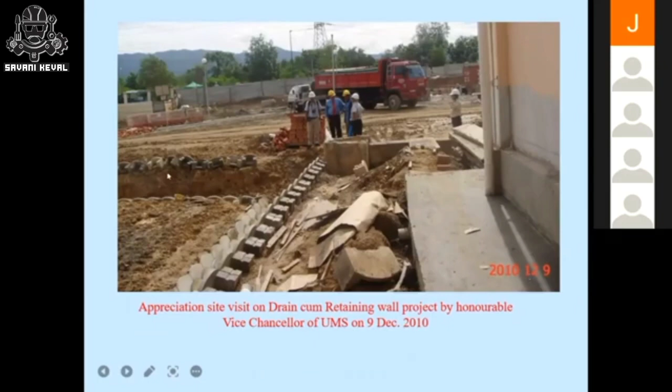This is not complicated because it's non-structural and has no steel rod, very simple, but because the drain was an L pattern, how is the connection? In those days I did not look into the connection, I looked into my product. Then for this connection point, we considered using the conventional system because there's another underground pipe here. So we did this - we consider some of it, we put this cast in situ concrete and just adjust.

Then after that, just look into the scupper drain, because from the car park the water has to come through. Initially I did not think about whether I need to consider a hollow or not. Then after that, we hacked that portion to fit this one, because this was the first project. Just look into this one, because the scupper drain is here since water has to come. Another disadvantage we saw in this project - once they placed this one, they said the drain bed is quite below the design invert level. That's why they filled this concrete to get the level, because on that side, the lower side, this one is far below the lower side. That's why they filled this portion.

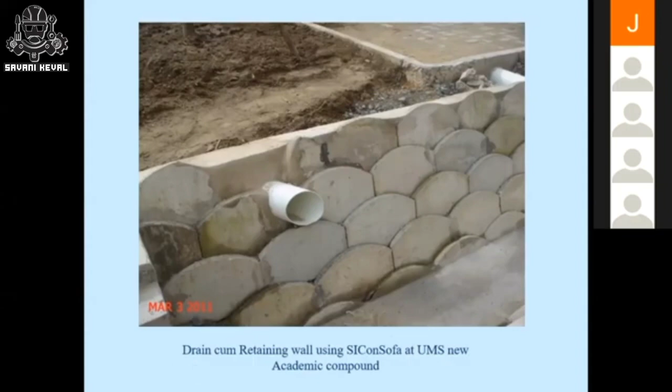You can look into this one. Because the system here, I have not seen water holding - that's what we call going into mosquito breeding. You see this one here, it is always a dry condition.

Now this photo was taken this year, I asked someone to send a photo. It was designed and built in 2010, and this is 2021. You can see the maintenance period.

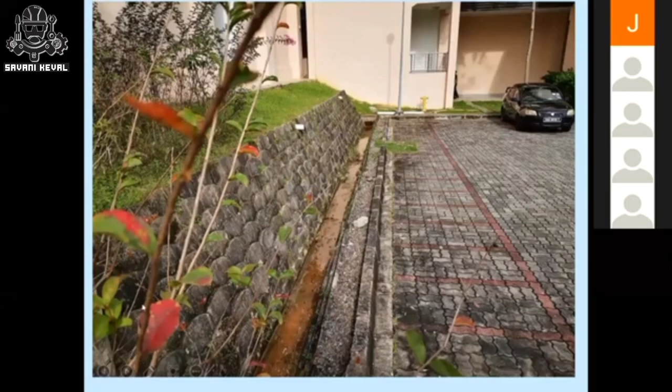They do not do any maintenance except grass cutting. Like this one, this is the bottom side, because water is continuously coming from that side. Here we can see water, but on another side there is no water. Here also, if you look into this, the green, they keep on cutting it. So if we allow this grass to grow, then heat island can be minimized as a green product.

You can look into the surface load application, meaning the parking area - they place their car like this one. It is in one sense considered that surface load is okay. Then look into, sometimes they also put a motorbike. Then we look into whether we can go for other applications or not.

In another project, we tried, but the cost is high. That's why they did not consider it. It was about a 2 kilometer retaining wall project in Sabah, and at the time I left. So due to miscommunication, we couldn't manage this one.

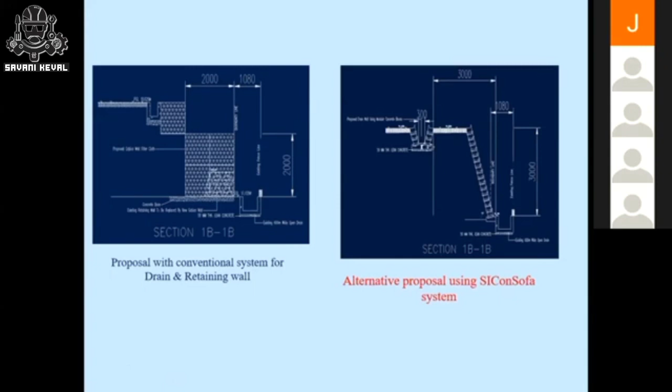It needs continuation. Okay, just look into from the design point of view, the written one is structure. To look into sliding factor and overturning factor, including surface load. We consider different heights, 0.5 meter to 3 meters. Our normal drain is considered at most a 1 meter drain, roadside drain.

Then I look into different heights and also the angle. We have provided 70 and also other angles. Then we also provided the surface load: 0, 10 and 5. Then we look into the safety factor for sliding and overturning, whether it is more than 1.5 or not. Then we have got this result.

Then look into, if I go like say 3 meter height, then I look at surface load, because anyhow the safety factor for sliding should be more than the requirement. Then I have also gone with 68 and 65 degree slopes. Then we have got satisfaction.

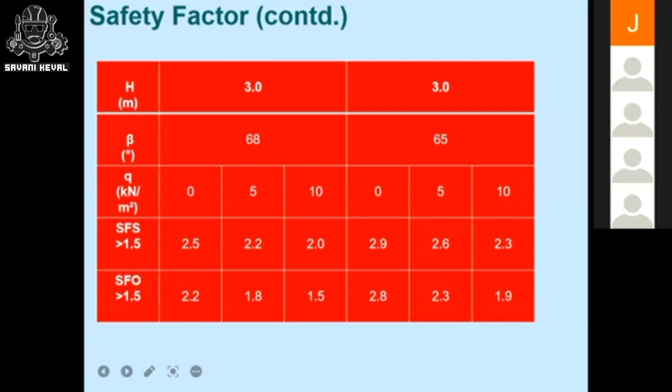Then I look into my product should go also for another application, slope surface protection, because in Malaysia, particularly Sabah, there are more than 500 locations with slope problems. Slope failure or landslide always happens due to prolonged heavy rainfall. Infiltration impairs slope stability during high rainfall. Rainfall duration and intensity, slope surface, degree of saturation, slope angle, permeability and water table all signify slope stability.

This research was done by my one professor at UPM. In field conditions, he used 122.4 mm rainfall intensity, and at the site he also used different kinds of covering. For infiltration rate, he observed: natural grass with a geosynthetic net 3.24 mm, cut grass with geosynthetic net 7.2, geosynthetic net alone 10.84, and bare slope 24.88. Meaning, if it's bare, the infiltration rate is quite high.

Then look into slope failure. We look into the widespread occurrence of landslides being associated with slopes and heavy rain. Like in other countries, in Sabah, Malaysia, construction of buildings, roads, etc. across hilly areas, which involve cutting slopes to a certain extent, cause the occurrence of landslides to be more frequent and visible.

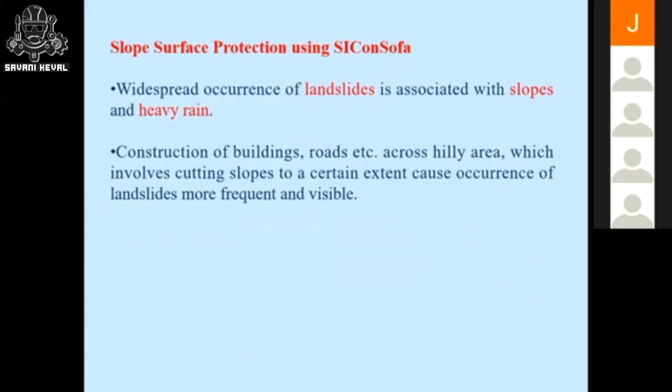With the same story, I'm not reading this one. Same - we look into how they do that covering. Normally in Malaysia, the slope surface is covered by vegetation or a rigid surface. Vegetation surface normally uses signal grass and also legumes - they use this type of vegetation surface covering. Shotcrete or masonry as a rigid surface is normally also used.

Shotcrete, masonry, or stone pitching is used as a rigid surface protection. This system is highly impermeable. Weep holes are provided at regular intervals, horizontally and vertically, to reduce build-up pressure on the slope during rain. Sometimes soil nailing is also done, including shotcrete application. Hydroseeding is also done, like grass rooting, for protection.

I looked into a different point of view, because my product, if orientation goes deeper, it looks like fish scale. So I looked into a conceptual approach for slope surface protection using my blocks, shown in the following figure. But it needs investigation to fulfill the requirements of the construction industry, because I have not done any actual work on slope surface protection.

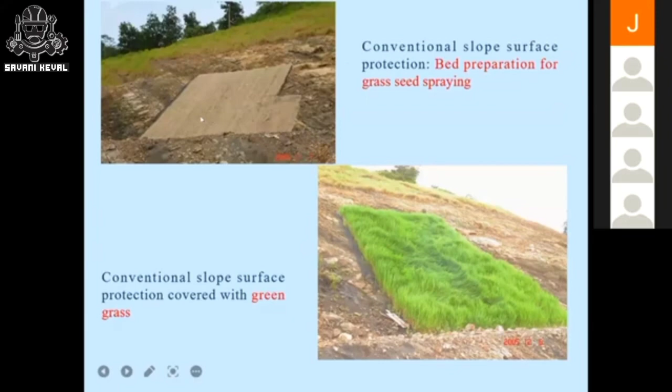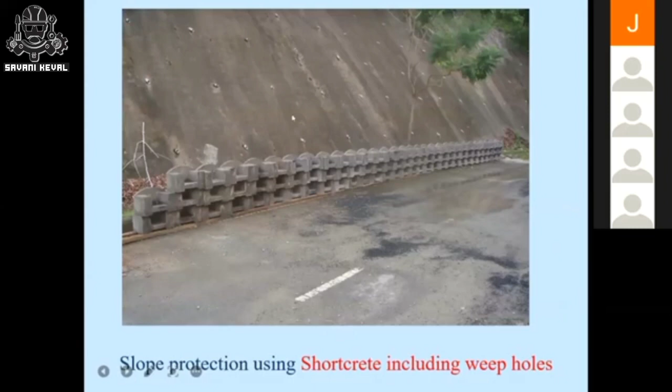Also look at this one in the Rivers University campus. They used shotcrete here, including weep holes.